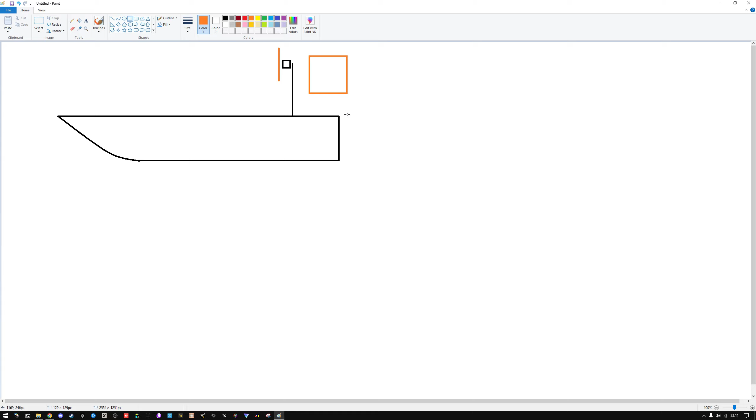And then the last thing that he had was a fin at the back, something like that. So this was connected to a servo in order to actually make the whole thing maneuverable. Okay, so first of all, we did this. Now the second section that I'd like to do is a section somewhere around here, because it doesn't change much at the front. It only tapers down, as you can see here.

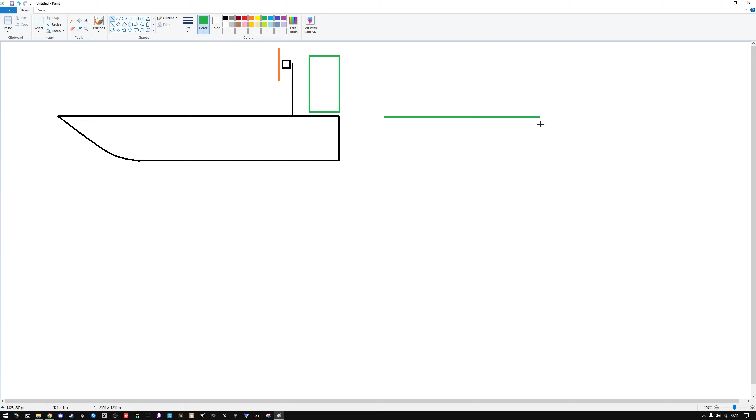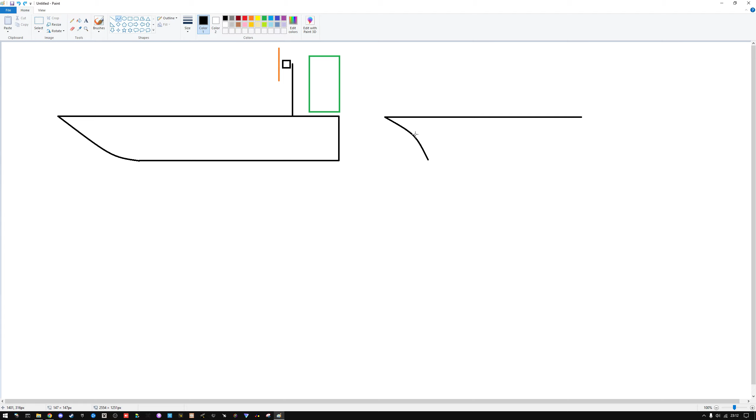So let's do another section. Try and make it as scale as possible. Something like this, because it was quite square. And let's choose the right color. And then we had something like this, roughly, and that was kind of bent inwards. Oops, that's not supposed to happen. Let's try that again. So something like that, and then bent inward. And then the same thing on the other side. Roughly like this, and then bent inwards.

And obviously you can finish that off with a flat line at the bottom. Something like this. So this is the section that we saw. And obviously I'm not going to draw the motor and all that. It's not really that important for this section, but this is what we had. Now,

I'd like you to do an experiment. Go to your kitchen sink and take a spoon and hold it upside down, let the water run, and then hold the spoon right next to the water flow. What's going to happen? Try it. Pause the video here, go and try it, have a look, and see what will happen, because the next part will be all about that.

If you paused the video and you're back, then let me explain what's going on. This front part is a bit shaped like a spoon. Obviously, the curvature of the spoon is very different and so on and so forth, but it has a curvature.

So the first thing, before looking any further into eccentricities, thrust lines, etc., let's look at the shape of this front and how water flow was behaving both in the video as well as on your spoon. Because if you remember from testing this out, you may have noticed that the water was kind of hugging the spoon, right?

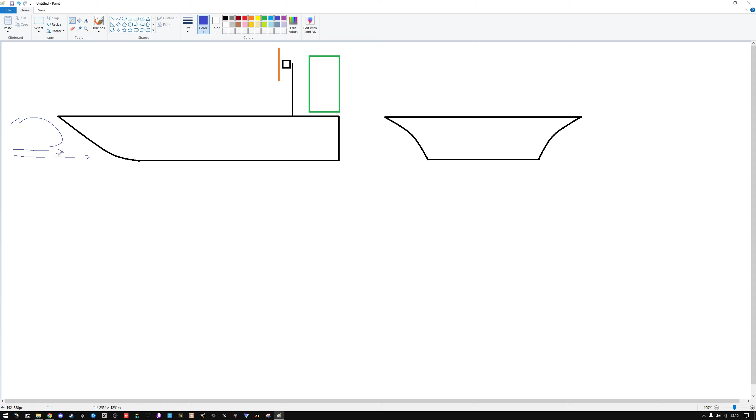non-compressible fluids behave. Okay? So there were two things that we could see, and one thing that we can definitely visualize in this section, which is how the water flow was behaving that was coming from the front. So the first thing that we noticed is we had water flow that was turning itself back around and going towards the front. And then we had obviously some of the water flow which was going underneath.

But if we were to do a finite element fluid model, what we would see is that this water flow is something like that, okay? Like the directional lines of the water flow will be something like this. I don't have a fluid dynamic software installed because those are extremely expensive. And I'm not going to install one because I know how it looks, okay? And it looks exactly like this.

We have a pocket which has almost static fluid, okay? It's not really static, but it's almost like it is static. And then we have some fluid which is being pushed out the bottom and under, so like that. And then we have fluid which is being pushed up, right? And it's going up like that.

If you try with your spoon, you might notice this as well, because if you change the angle of the spoon, not only will it pull the spoon inwards, but you might see some water coming in the opposite direction, right? It's almost like water going back up. And this is because water is actually relatively sticky, okay? When you think about it, it's not a fluid that can exhibit laminar flow and separation. It cannot separate off from a surface. It has to stick to a surface.

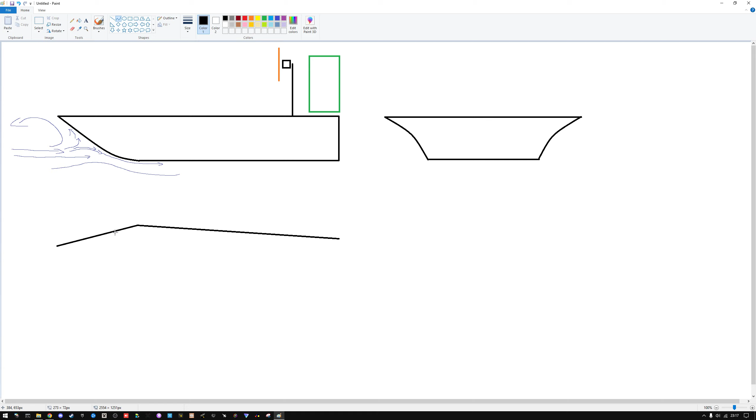Okay? Something like that. And if I draw a straight line from this point to this point, I think you can see what this resembles, right? This resembles the airfoil section of a wing. And as everybody knows, lift is generated approximately here.

Well, in water, we don't have lift as such because lift is generated by high velocity, low pressure airflow. And we don't necessarily have that in this case.

But if you tried something similar to this, and let's say you took a flat water bottle, fill up your bathtub, and then drag the water bottle across the surface, you'll notice how the water bottle will start to dig itself in. I call it digging. Obviously, we're not digging. It's not soil, it's water. But it's almost like it's digging itself into the water as you're moving it across.

And the reason for that is because this fluid, as it's going around, I'll draw it in blue, it almost creates a kind of suction at the bottom, okay? Because it can't go any other way apart from the bottom. And so it tries to escape the bottom by moving faster towards the back, and by increasing the velocity, it actually manages to stick better to the underside of the boat, right?

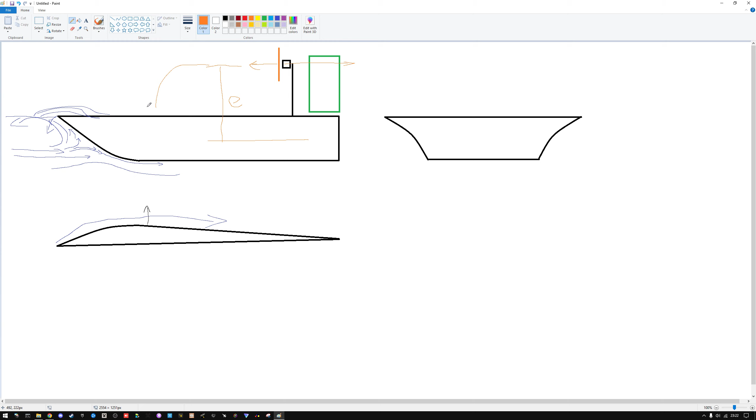And then if we say that our CG is somewhere here along this line, then essentially we have an eccentricity, okay? So that is a moment that is going around this eccentricity. And it doesn't actually matter where the CG is of the boat, because the eccentricity is always the same. It's where the line of thrust is perpendicular to the CG, okay?

So speedboats, or any kind of a boat, have a correction for this, because obviously in a normal boat where you have the prop at the bottom, somewhere here for example, your line of thrust is here. But what speedboats can do is they can actually vary the pitch of this, right? They can angle the motor upwards, or they can angle the motor downwards, thereby angling the pitch downwards. So this is another topic, and we'll have a look at some images online of this.

But the eccentricity of the prop, combined with this effect here and what's happening at the front, as well as the fact that this is being pulled in, it's almost like it's digging itself in. These are the two main contributing factors.

And now, if we think about how we can improve this, there's quite a few obvious solutions, okay? So the first part is don't make the front flat, okay? That is a recipe for disaster. What we're trying to do is push the water out of the way, and pull the front out of the water.

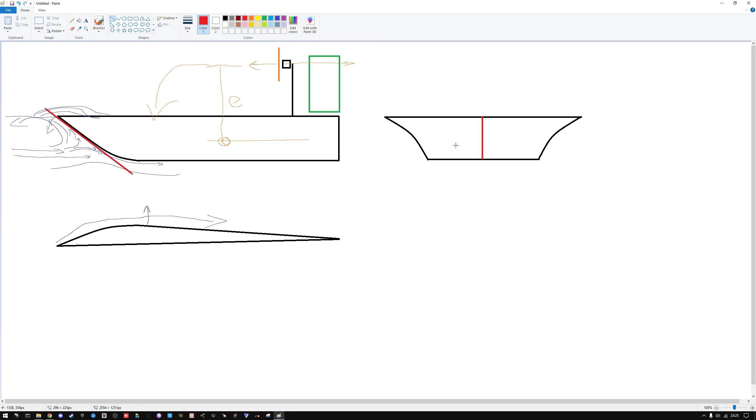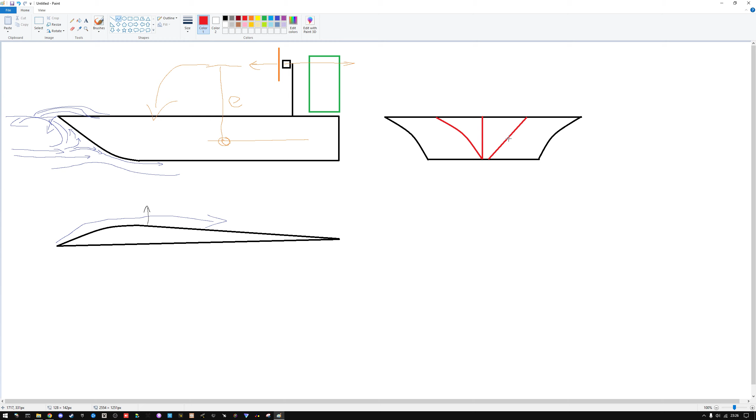So if you had to take a section along here like that and look in that direction and upwards, it would be nice and pointy, so definitely not flat. Sorry about that. And then as we're moving out to the following sections, we would have something like this, and then something like that on the other side. Because this will actually help us to not only cut through the water, but also to push the water in the correct direction.

And what I mean by push the water in the correct direction is this. When the boat is moving, obviously it's cutting through the water, but part of the water is also being directed outwards, into this direction. So rather than it being directed forwards, it's being directed partially forwards, but also more towards the side. This is why speedboats tend to be very long rather than very short, and have a very shallow angle.

What I mean by angle is basically the angle between the oncoming water and the tapering of this, because this tapers as it goes back. Most likely it's actually not going to taper like this. It's more likely to taper like that, almost like a bullet shape, like a dome. And then the center line obviously is here.

And so if I drew the height lines, it would be something like this, where the bottom stays, and then maybe at some point it becomes actually flat. So for example, this is where it's flat. This could be a section like this, if you wanted to have a flat section, but then the rest of it would actually all be tapered. And we'll have a look at some pictures online, but let me go back a few steps before we rush into that, just to summarize.

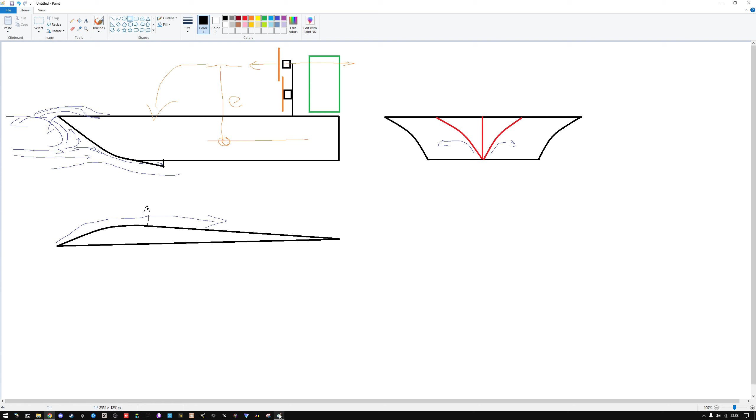So what I would recommend is, if he uses something like this, which essentially there is no problem in doing so, it would be a good idea to possibly take some thumb screws and have thumb screws in all of the four corners like that. And then as you're screwing in these thumb screws, you're basically preventing that lid from coming off no matter what pressure you have.

Alternatively, if you want it to be a pressure fit, or you want to have almost like a little lip that goes around, so it would look like this, a bit like that, and then the outside is a smaller dimension than the inside. So essentially, that's your lid right here. That is basically looking at, for example, this internal wall here. So obviously you've created a pressure fit, and this fits great.

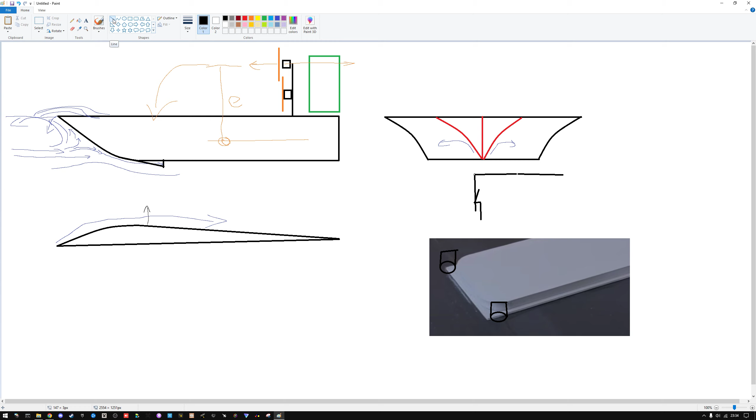And now all you need is to have a little bit of a vent hole. You can do this with a straw, for example. So I have something like that, somewhere at the back where it's clear from anything, and it's safely above the water line. And then what that will ensure is that any pressure buildup that you might have on the inside of this, all that pressure can escape through the hole, right?

And many RC boats have things like this to ensure that pressure can be equalized, or they're being cooled internally or whatever. But they do have some way of venting, right? Because if you have high pressure buildup, then essentially you're just creating more and more trouble for yourself.